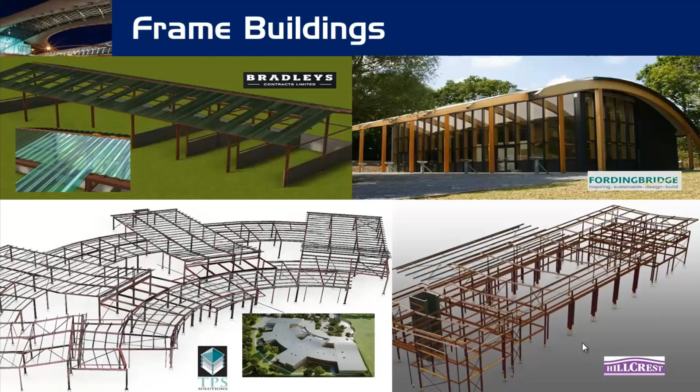Now let's take a brief look at some of the projects our customers have used our technology to help them deliver. We have commercial structures, buildings, hospitals, fire stations. We've got ice rinks, schools, stadiums.

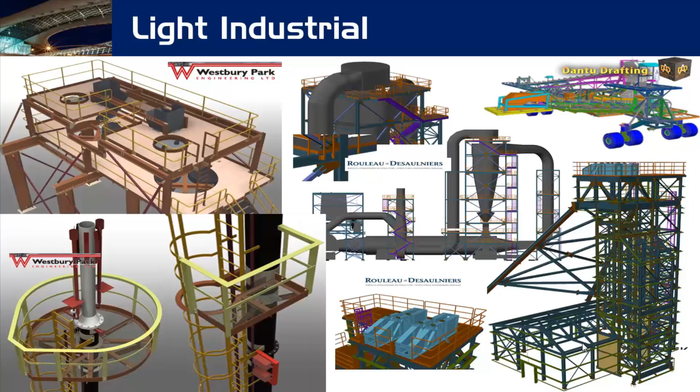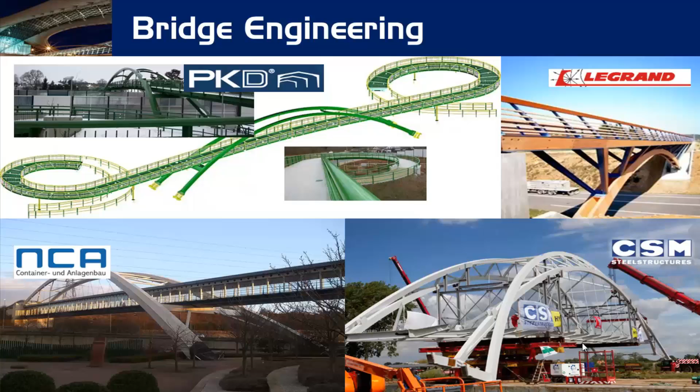Another area that we're particularly strong is in the oil and gas, offshore, petrochem, pharmaceutical. We've got a good customer base in the material handling and mining industries, towers, cranes, quarries, and of course we're very strong in bridges. We've got our own analysis and design software in there, as well as the steel software to deliver the detail, plate work and boiler making as it was in those days.

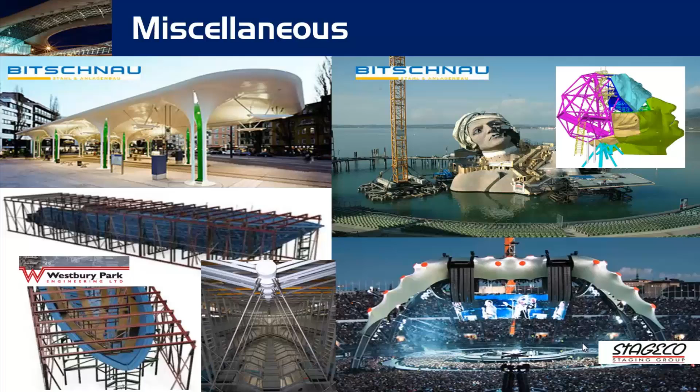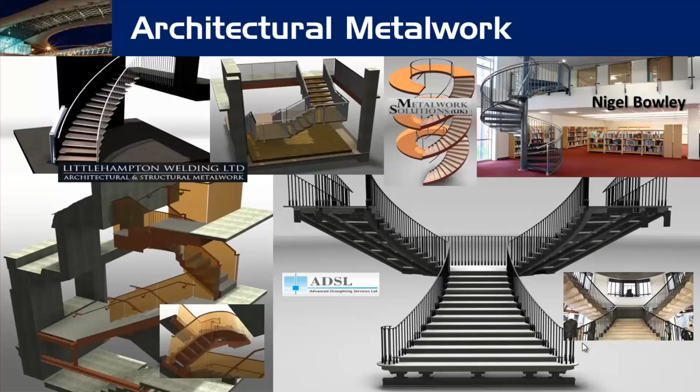Mezzanine floors is a big area where distribution centers are popping up, large warehouses, but also to make space in areas you've already got. Miscellaneous stuff like stages and bus shelters and stations. We've got a very strong customer base in architectural metalwork, using our technology to create some very iconic projects indeed.

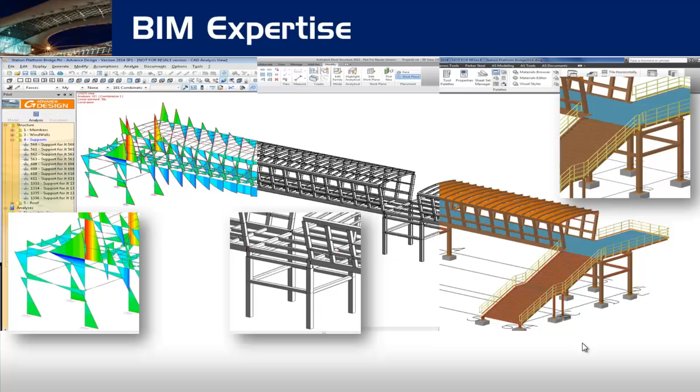Taking that one step further, if you take a slightly closer look, you can see the analytical model is a stick frame. The descriptive model would include other services, perhaps a ground model as well. We're not showing that in this example, but it would bring other industry or disciplines together. And then on the right-hand side, you can see hand railing right through to the base plates, nuts and bolts.

So to break that down, you've got function, optimization of the structure, design of the structure and proof that it works, through to describing how the services come together, coordinating different disciplines and sharing that information. And then on the right hand side, the fabrication, the build, the management and connection of that through the phasing and lotting and so on.

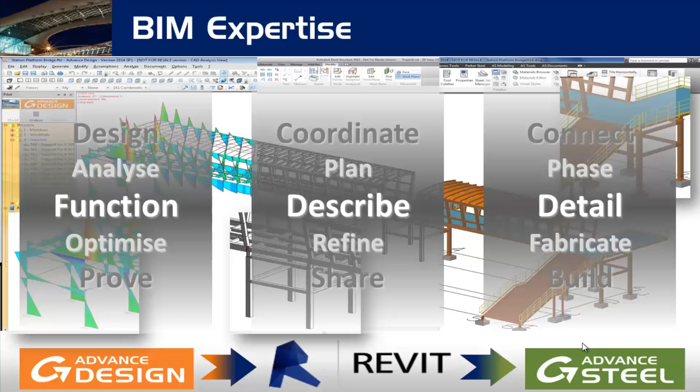In this particular example, we're looking at the interoperability and the sharing of an intelligent model between Advance Design, Revit, and Advance Steel.

I hope that overview was useful, allowing you to understand more about what Graitec offer and the technology and services that we deliver.

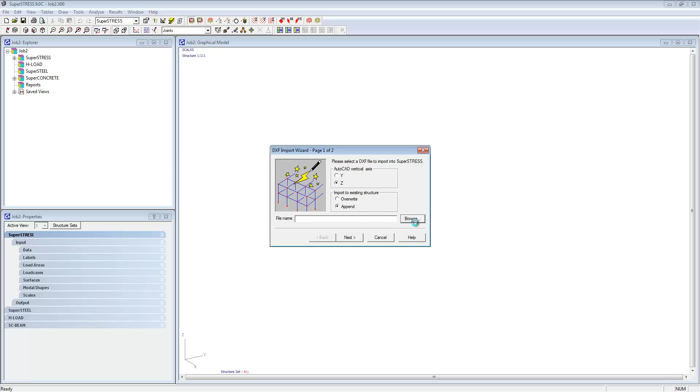To start with, we are going to start a job in SuperSTRESS. Now of course you can start a job many ways. In this example we are going to import a DXF file which could have been generated from AutoCAD. But of course you can start with a blank job through our wizards or through any other means, importing BIM files from other software packages.

So I'm just going to add in a few sections here and take you through some of the basic functions of SuperSTRESS. We're going to add in additional bracing onto the model that's been imported, just using the graphical view that SuperSTRESS has to offer.

And once we're adding that bracing in, we'll then be able to add in some loading and some support, some more analysis options. So we're going to have some bracing on the columns as well.

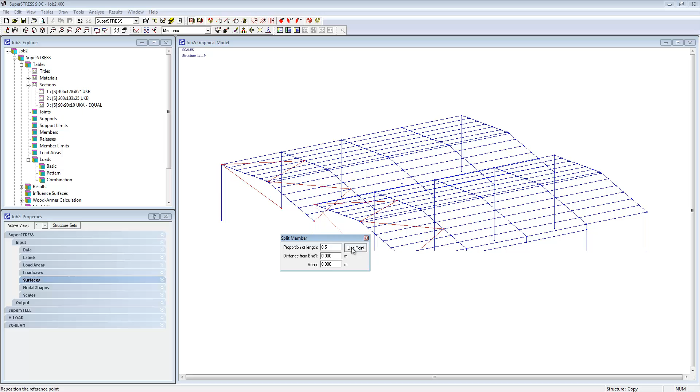We're going to create cross bracing, so I'm going to copy all of those by just using a filter through the selection option there of the specific section type that we've added in. So you can see it's very easy to use and very easy to build up a model and make modifications to a model very quickly in SuperSTRESS.

So that's the bracing done. We're going to now add in some fully fixed supports along the bottom, again using the graphics, and put in some basic loading. The first type of loading we'll be doing will be self-weight, and put that on the whole of the structure.

And then we're just going to analyse that. Obviously you can do more loading if you need to as well, point loads, line loads.

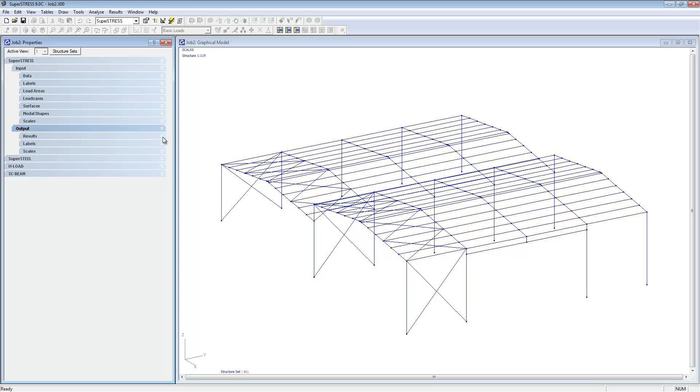And we're just going to show the analysis results on the screen. This is just showing the bending moment on the structure. We can isolate parts of the structure to show just parts of it with the bending moment detail on there if you prefer.

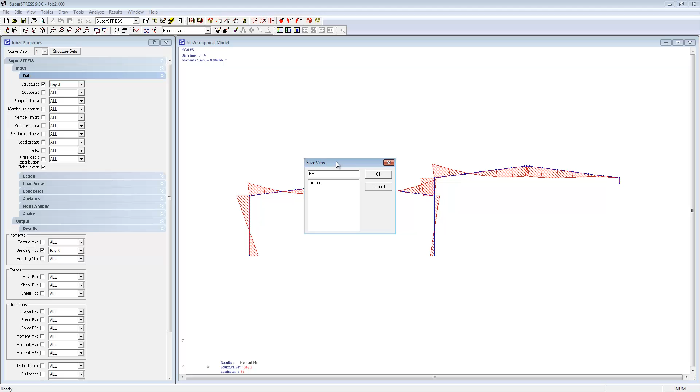And we can isolate the whole structure down to just show that area that we've selected. We can then save views of that detail and include those in a report.

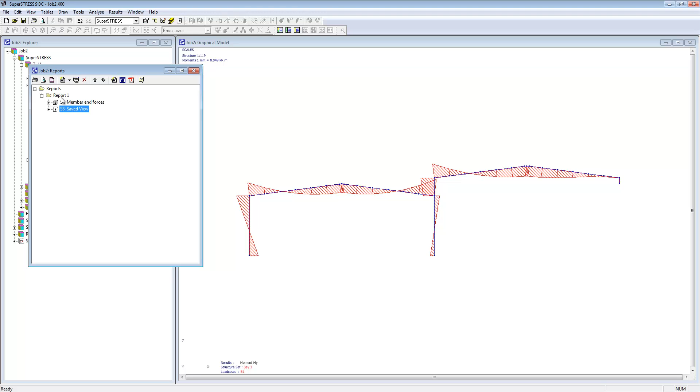So we're just going to create a new report and put in some sections, some of our results filtered down by this selection I've created, the structure set, and include the view I've just created as well. So there's some tabular data and then the view.

Okay, so we're just going to go back to the main model, and now we are going to export this as a GTC file. This is our internal file type that Graitec uses, so that's exported the GTC file from SuperSTRESS, and I'm going to bring that into Advance Design.

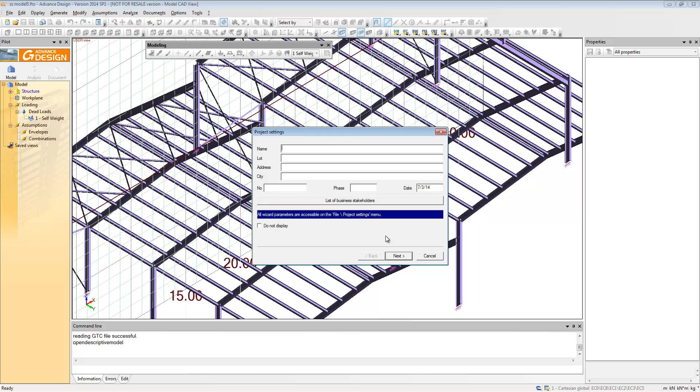So you can see it's a GTC file just imported straight from the SuperSTRESS model, and it comes through as you see the model in SuperSTRESS. So the additional bracing is on there, all of the sections would be on there, all of the supports, the loading, everything we added from the original model comes through as is.

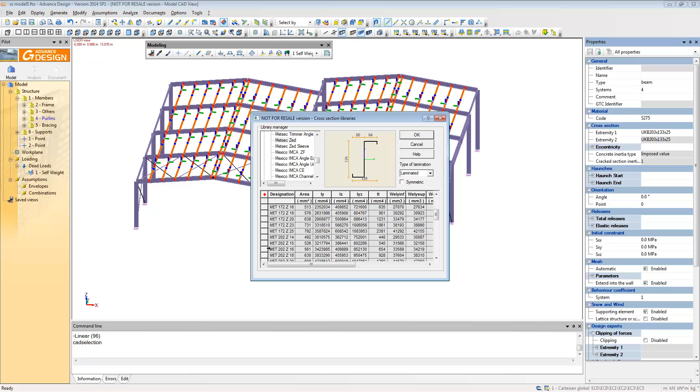So Advance Design has more advanced functionality, and we can do additional options here like putting in some cold rolled sections, which we're going to change the purlins to, and we can also just get those changed, and we can also change the orientation of these and the eccentricity.

So you can see at the moment they're not orientated. The eccentricity is not set, so we're just going to change the eccentricity, and we're going to now just isolate the purlins. You can see we've got the same filtering options that's available in SuperSTRESS, in fact a little bit more powerful in Advance Design.

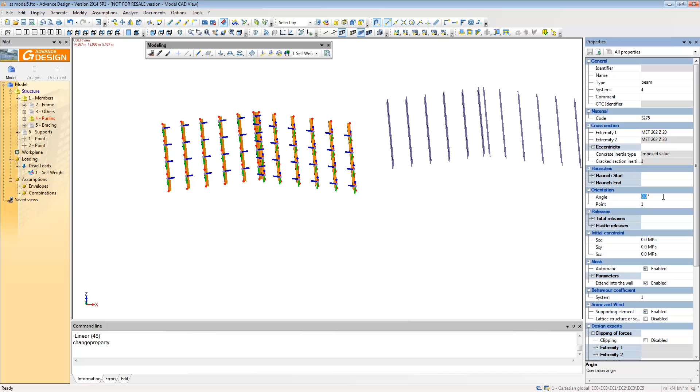We're going to change the orientation of them so they are sloping towards the points I added previously, and the same for the second span, and then you can see that these are now orientated towards the centres.

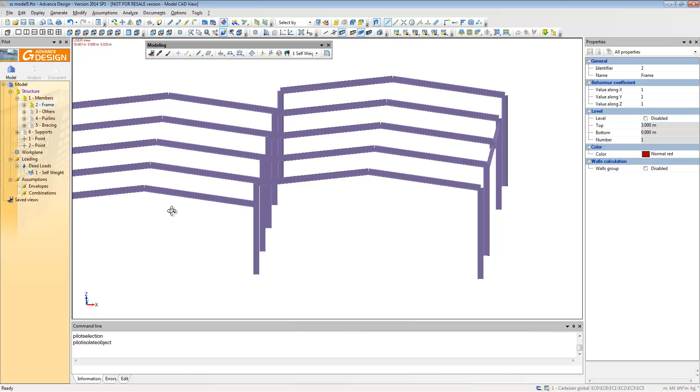And we can change the eccentricity of the main members as well, all covered by the properties on the right hand side there, so everything is consistently modified or added through this properties window. We can even add on haunches on both sides.

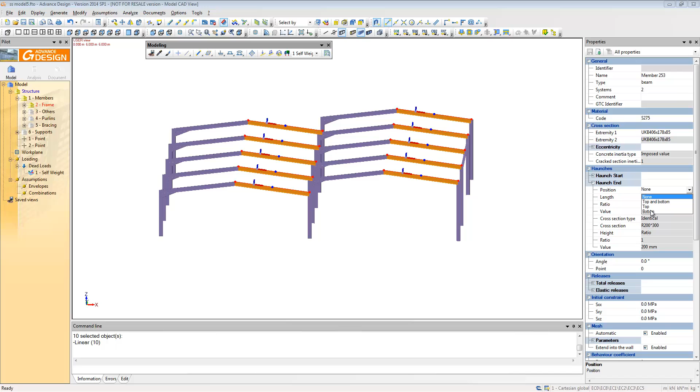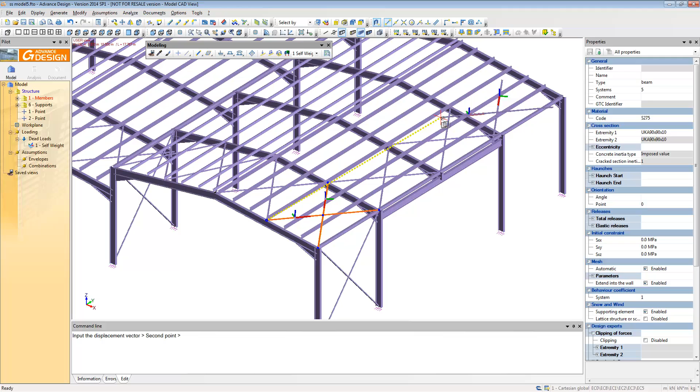And then we just display the whole model, and select some more bracing to copy down. As you can see, it has the same CAD functionality that you would expect, and you can use the snaps there just to copy members down.

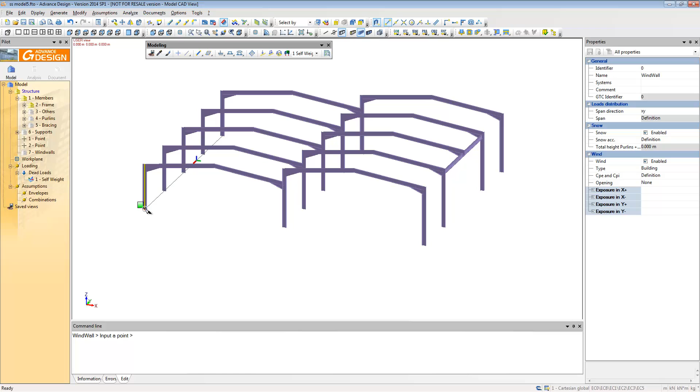We're also going to create wind walls, which are areas of the structure that we defined as an area of a side, and then we can actually load climatic loading onto that side. So we've created a new group for that in the systems there previously, and we're going to create all of these very quickly just by snapping around the structure.

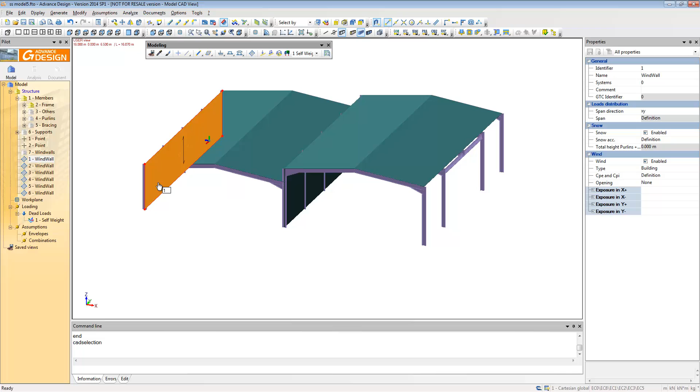You can see you've got the same AutoCAD snap functions as you would expect, and we can do very quick copies as well from one span to another, and then finally finish off with the end bays. So I'm just going to copy those round and then copy them from one side to the other.

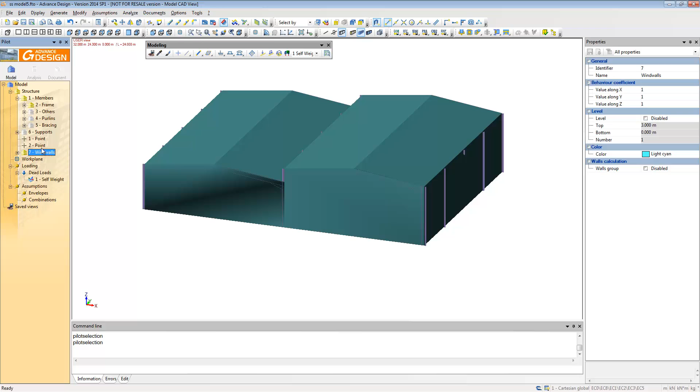Okay, they didn't actually go into the system, but I can very quickly select them and just drag them into the system, so they're now grouped in the system and can be hidden or isolated afterwards if you prefer.

Okay, we'll just show the rest of the structure. Now we put on some additional loading. We've already got self-weight on this from the SuperSTRESS model, so we're going to put on some snow and wind.

For the snow, obviously I'm going to select from a map. We can select a part of the country, and it automates the snow loading, which you can see there.

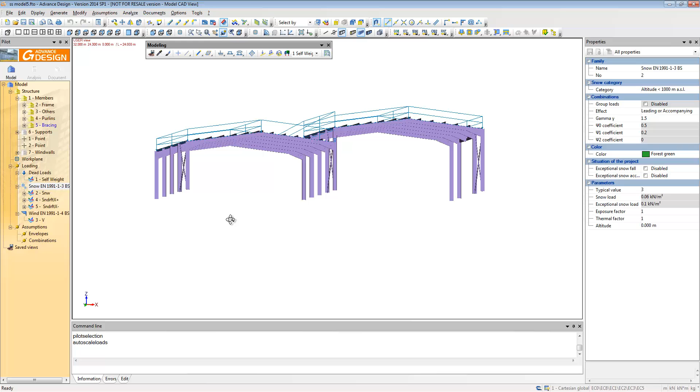Okay, exactly the same principle for the wind. Obviously you need to be aware of the Eurocode 1 properties that are set in the properties window there, to make sure that you understand what is being asked, but the automatic loading can take care of the rest.

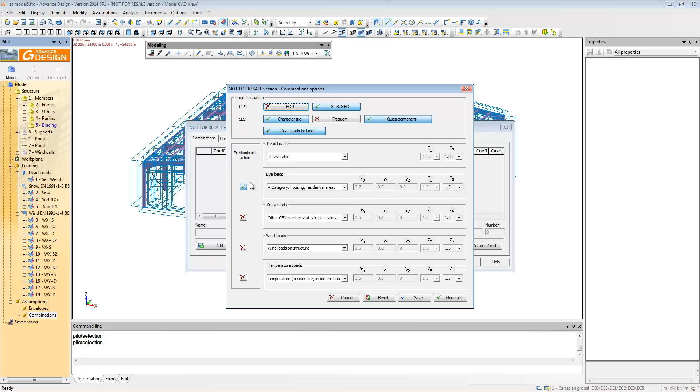And same for the combinations. These are created automatically based on whatever we're choosing, so we can place those in and get it to automatically generate.

So we're now going to calculate the structure, analyze the structure, and have a look at some of the results.

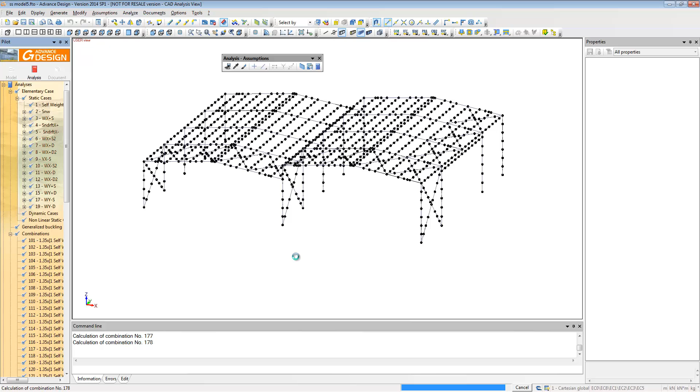So you can see the meshing has been done automatically. There aren't any plates in this particular job. If there were plate elements, they would be meshed as well.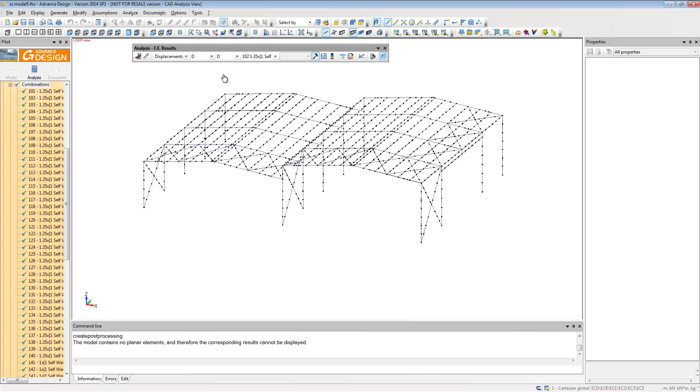So that's now finished, and we're just going to show some of the results. So we've got all of our basic loads and combinations there, so we can show displacements on the whole structure. We can turn off the mesh just so it's a little bit clearer.

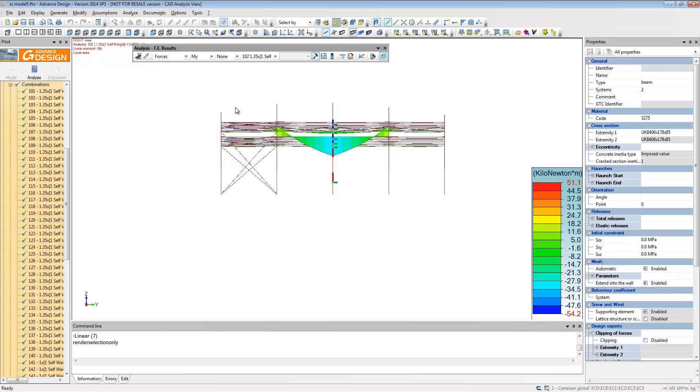We show forces just like we can in SuperSTRESS. There's our bending moment. We can do exactly the same principle that we did in SuperSTRESS by isolating the centre bay and show just the force on there.

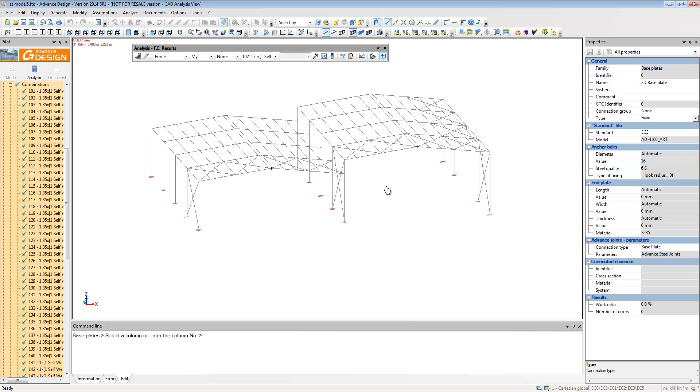So going back to the whole structure, we are now going to put on some connections. So we can place on a base connection, make it fixed so it follows the same as the support, otherwise we would have had a warning appear to say that this is not the same type.

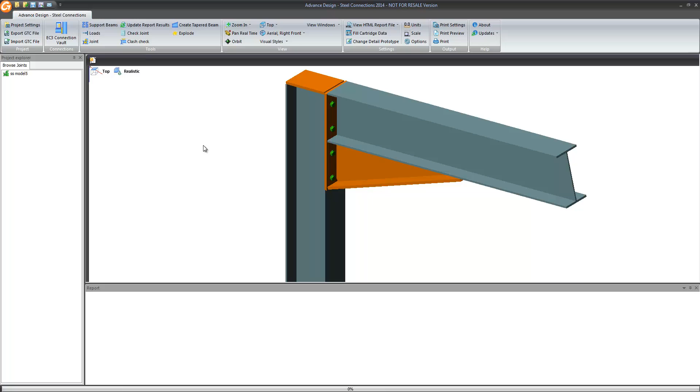And we're also going to place on a beam column haunch connection. And we can now go through to Advance Design's Steel Connections program, where the support will come in, the connection will come in, and we can then follow the detail of the connection and in fact carry out a design of that connection.

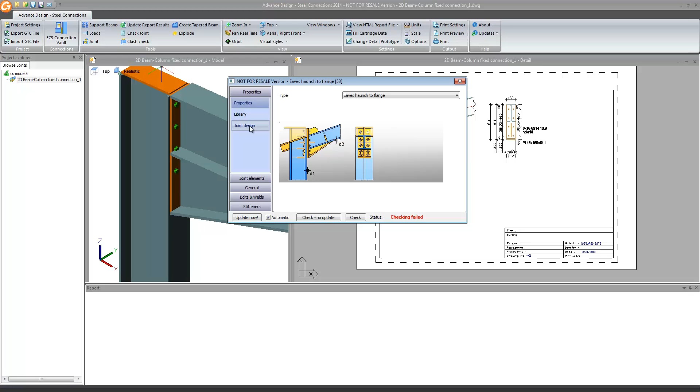So here's the connection come through. As you can see, we do need to make some changes. Some of the bolts need to be moved slightly, so we can change any of the elements in here. You can see from the joint design aspect, all of the loads that come through from Advance Design.

We're just going to change some of the bolt positioning to make everything fit correctly. And you can see anything you change in this dialog happens live on the model behind.

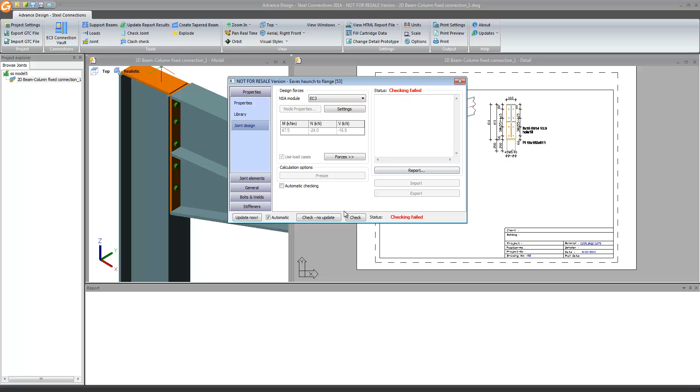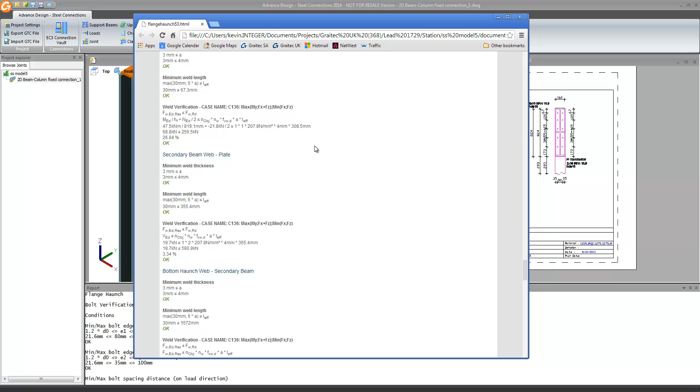So we'll have a look at the report, and we can get from here a very detailed report showing all of the checks according to Eurocode 3 for the bolt spacings and design aspects of that connection, which you can obviously then include in a report.

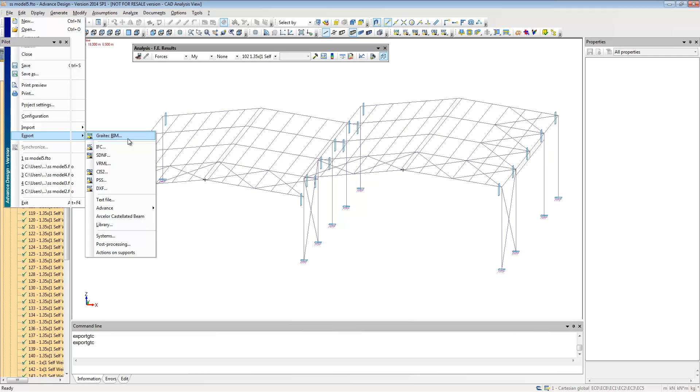So we'll save that connection, and we'll go back to SuperSTRESS, to Advance Design, sorry. And then what we can then do is export the whole job as a GTC file again, but now with the additional information on it that we've added in Advance Design, and bring it in to any other program.

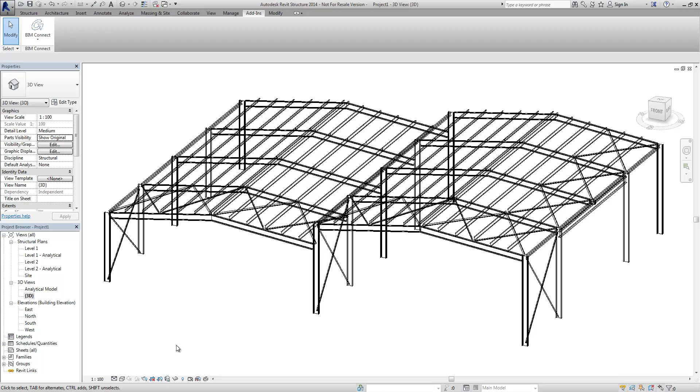So for example, we're going to bring it into Revit, straight from Advance Design, and the model comes through. Revit doesn't really have the intelligence to be able to display the haunches correctly, but that's a limitation on the Revit side. But everything else you can see has come through exactly how the model showed, and it will include the loads as well.

So if we look at all of the views in Revit, you can see that everything is correctly updated and aligned, and the levels are in place. Orientation and eccentricity of the members is there, and in fact we even have an analysis model created underneath.

It's created families on the fly as it comes in automatically, so you don't have to worry about associating families. They have been created or assigned for you if they already exist.

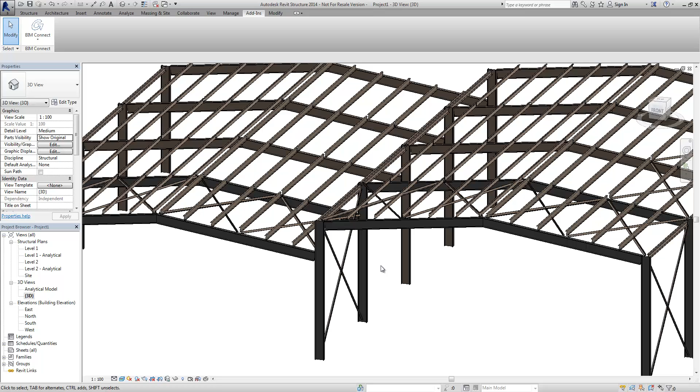So what we're also going to do is bring it in to Advance Steel for the steel detailing and fabrication drawing production. So again, importing it directly, but this time, as you see, it comes in with the intelligence that we already created with the joints and the haunches.

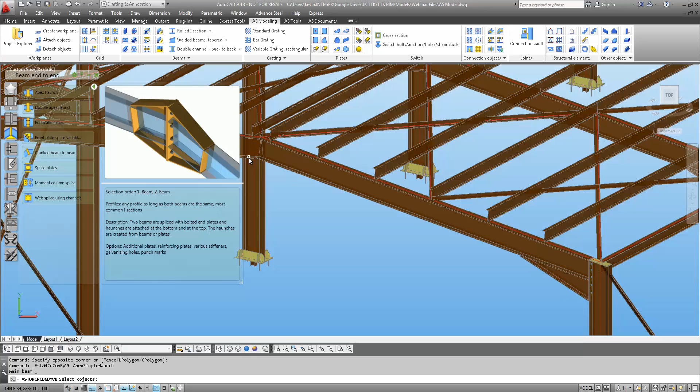So those have come through automatically, but we can obviously add more. So I'm going to add an apex haunch onto here, and we get a very similar dialog to the one you saw from the Advance Design Steel Connection program, and we can make modifications in exactly the same way.

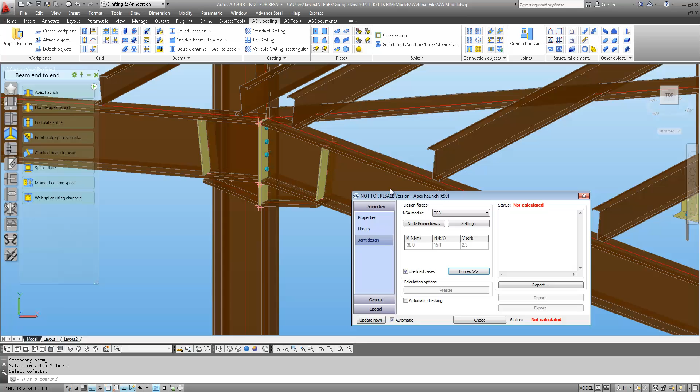And as it's come through from Advance Design, all of the loads came through with the GTCX file, and so we can carry out a design based on the analysis previously done. So you can either do this in Advance Design Steel Connection, or you bring it straight through into Advance Steel and design the joints there.

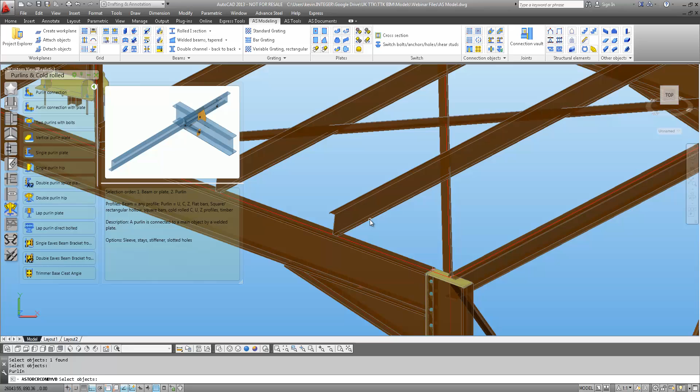So just going to put on another single purlin plate, just to show some more functionality of Advance Steel and how easy it is to add on connections and joints.

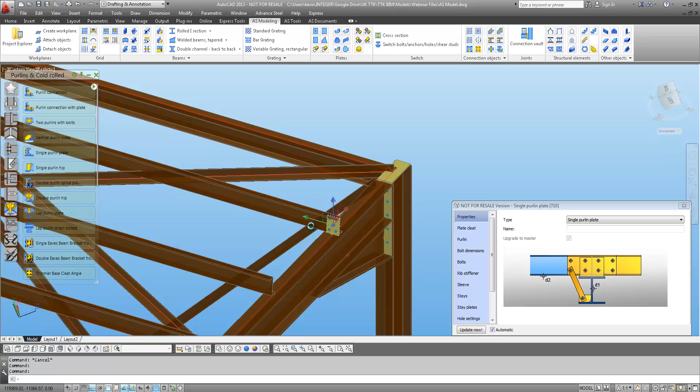So the same as with the Advance Design Steel Connection program, this dialog updates on the fly as we go through, so we can make any changes, they appear instantly on screen.

Okay, so now we're going to create some drawings from this. We've got a vast template of different drawing styles, so we're going to create some detailed drawings, assembly drawings, and GA drawings, just to give you an example of what you can create very quickly from Advance Steel using the Quick Docs functionality. And we can also create bills of materials and lists, and NC files can be exported from Advance Steel as well.

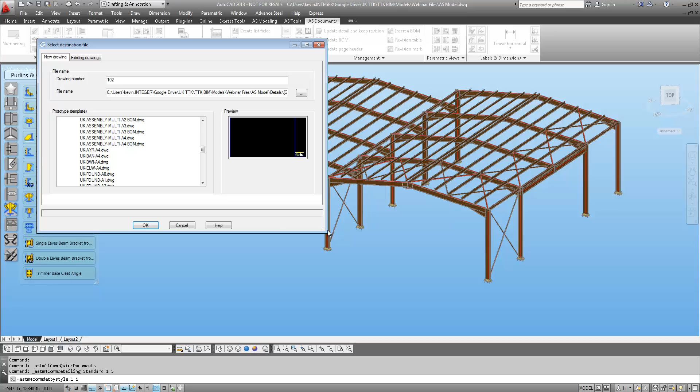So there's a GA, just a 3D GA being created. And obviously any changes that happen to the model, these drawings will be updated automatically, and those changes could come from Advance Design, which I will be showing in a second.

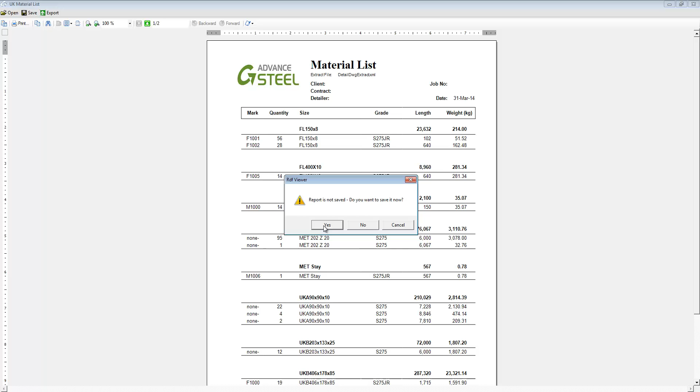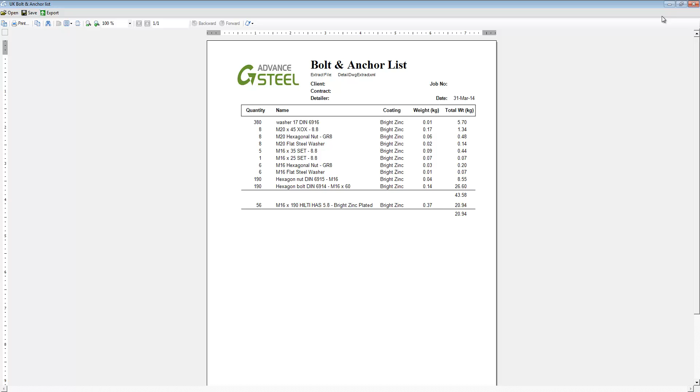So I'm just going to create some lists, material lists. It's worth mentioning, even though we're not showing it here, exactly the same principle can apply to our Advance Concrete program, whereby you can export a job with concrete elements, beams, columns, slabs, into Advance Concrete, and they will be displayed in exactly the same way as you see here, and then you can do the reinforcement detailing in Advance Concrete. And you can also take that exact same job through to Revit and any other program that may accept those objects.

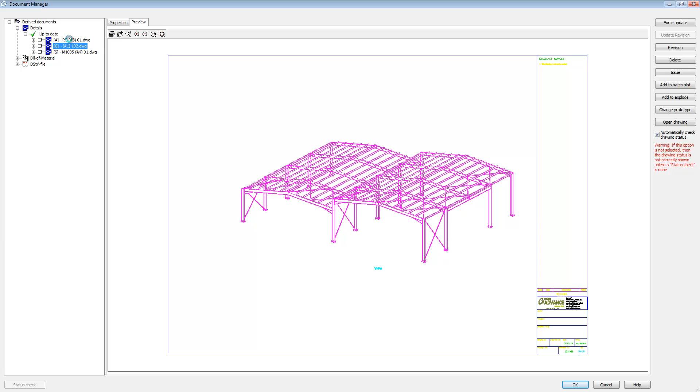Okay, so now you can see there's a document manager where you can view all of the documents created, and they're all directly linked to the model. And our bills of materials, our bolts and anchor list, and our material list.

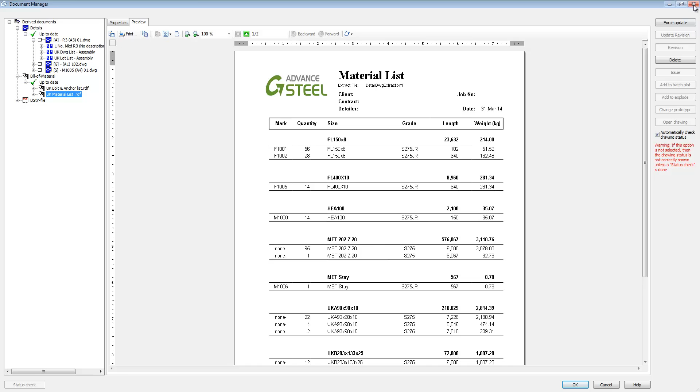So if we go back to Advance Design, what we can do now is make some changes. So I'm going to copy this bracing from one bay to another and change the section property of this column. So we'll change it to a smaller type section. And then what we can do is we could obviously export the whole model, but to make it simple we're just going to export the changes here.

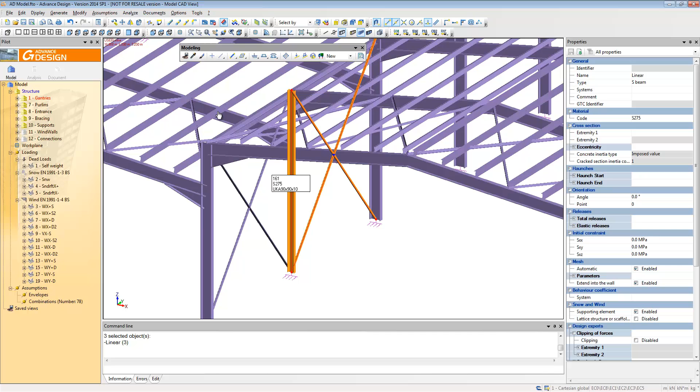So I'm going to create another GTCX file of the changes made, and we can then synchronize these changes. So it's saying export only the current selection, yes.

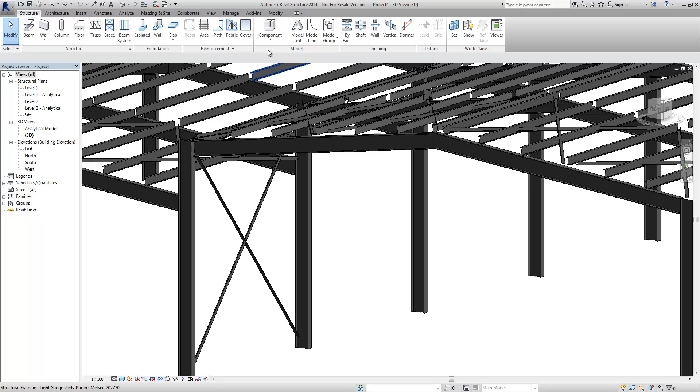And now we can go to Revit, and in Revit we can synchronize with the original model that we brought in. So we go to the synchronize option and load the changes that we made, the file with the changes that we made.

Obviously it detects these changes, so there are 2 additions that it's found, so we'll accept those. That's the 2 bracing elements. And you do have a revision tracking option there if you wish.

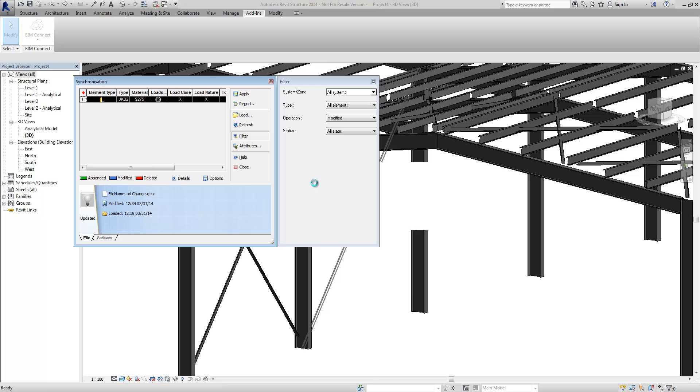And we're also going to synchronize the modification that we made to the column. So we can close that down, and you can immediately see the changes that have happened, and that is now the smaller type column, and the additional bracing has been added.

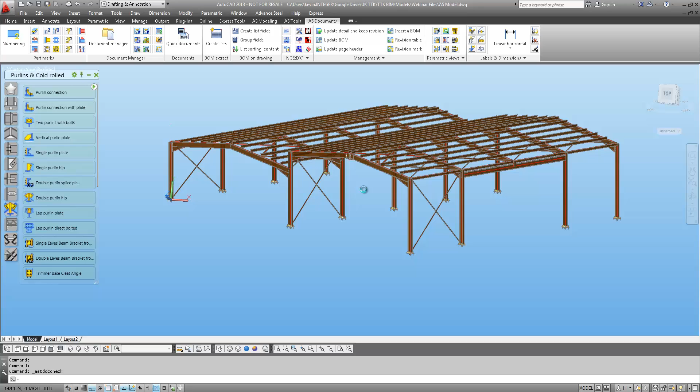So very easy to update with changes that are made, and the same workflow follows in Advance Steel and any other program that can synchronize with our GTCX files. So we're going to synchronize with Advance Steel, the Advance Steel model.

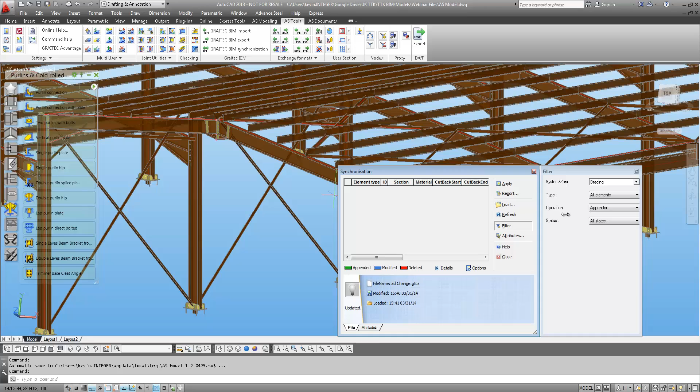Load up again the changes file and accept those changes that have taken place. Slightly more intelligent on the Advance Steel side is that any joints associated with the members will automatically update. So here we did change the column, and when we accept that change and apply it, you'll see that it's actually going to ask, do you want to update the joint associated with it? Yes, we do.